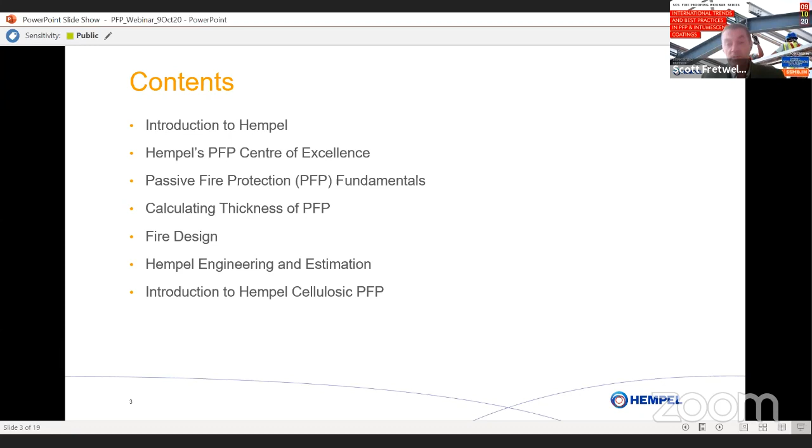So Hempel Paints, who are we? Hempel is a company with over 100 years of coating experience, able to offer a wide range of protective coatings to suit all requirements, from specialist coatings enabling fast steel production, to environmentally friendly paints and passive fire protection solutions. Whatever your requirements, Hempel will have you protected.

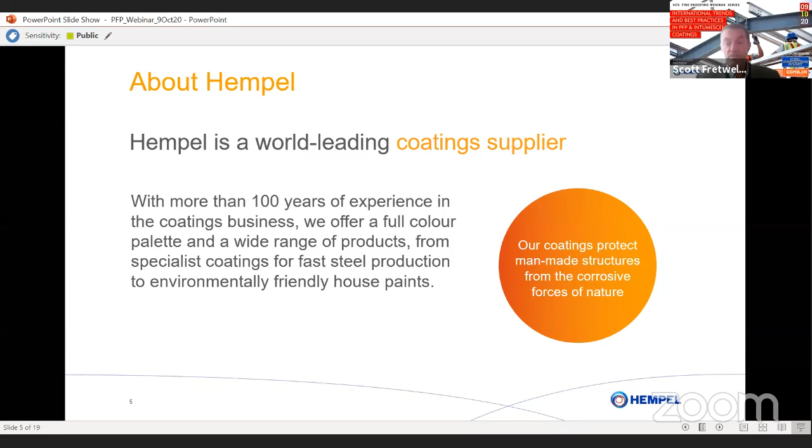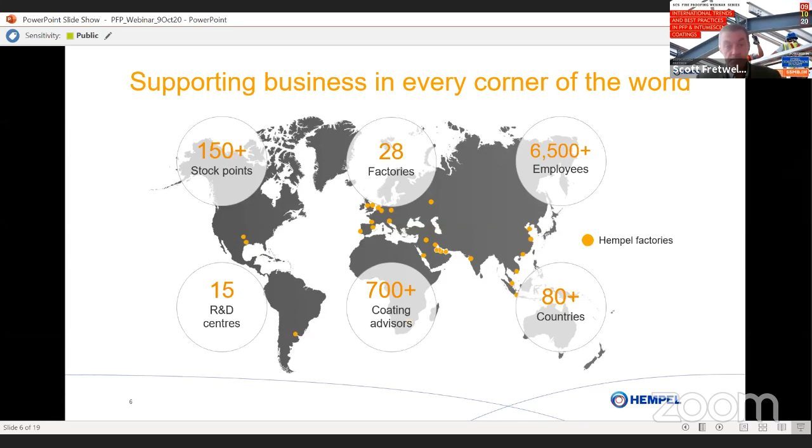We also have our global network of more than 700 certified coating advisors. With this, we're able to support your coating processes, specifications, and maintenance procedures to ensure the full utilization of your time and resources during coating applications.

For fire protection, at the heart of this is our R&D PFP Centre of Excellence facility. In 2018, we inaugurated our Centre of Excellence in Barcelona, Spain, which was purpose-built with one focus in mind: passive fire protection. This state-of-the-art facility comprises over 3,000 square meters of laboratory space and is home to many highly skilled professionals such as technicians, scientists, applicators, fire testers, and engineers, all dedicated to the development of fire protection.

So why do we do this? Why do we build this? Well, a few reasons: state-of-the-art fire testing equipment for product innovation, world-class product development, and to provide a base for our business technical expertise function, which enables us to further support our current fire protection products and customers with technical advice, estimations, and fire designs around the world. It's our ambition at Hempel to become world leaders in passive fire protection, and the building of this facility was the start of this journey.

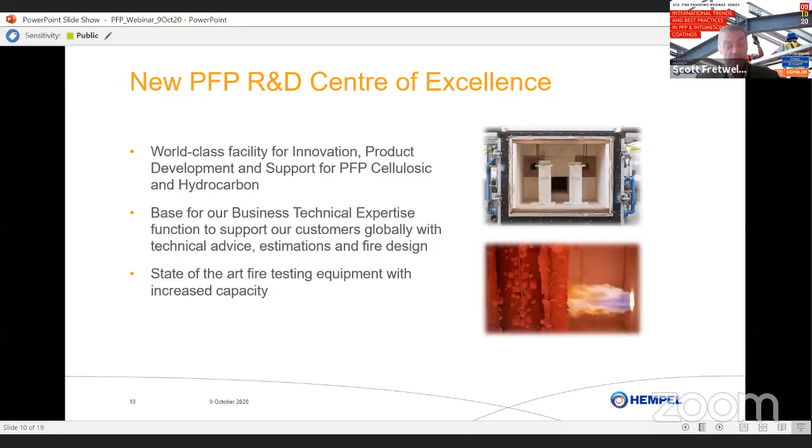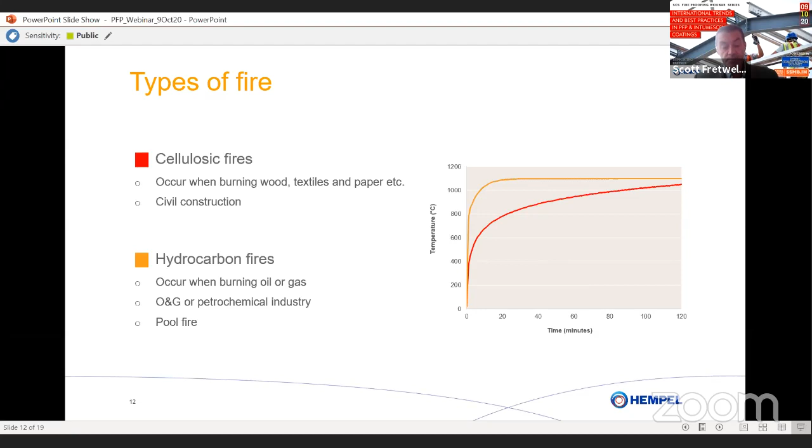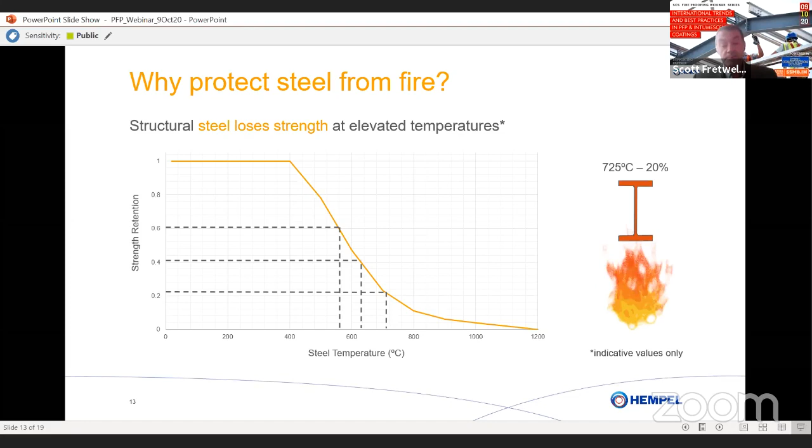So why do we protect from fire? Why do we want to prevent this from happening? Well, the temperature rise needs to be prevented so that the building can maintain its structural integrity in case of a fire.

This will enable safe evacuation of people in the building and also provide access and time for emergency responders to fulfill their roles without fear of building collapse.

If you would imagine a large multi-story building, and we take the picture on the right, if you were situated on the top floor and there happened to be a fire on the first or ground floor, you would hope and expect to be able to evacuate the building in good time and without fear of building collapse.

Another factor is asset protection. Buildings, as we know, are very expensive, and replacing the building every time there was a fire would not be sustainable. So protecting the building and the building's assets are equally very important.

And finally, there is legislation, a legal requirement to maintain these structures for a given period of time. And this is usually in accordance with local, national, international building codes.

So what is an intumescent coating? This is a reactive coating which resembles, in a normal day, a decorative system. And once applied, will lie dormant on the steelwork.

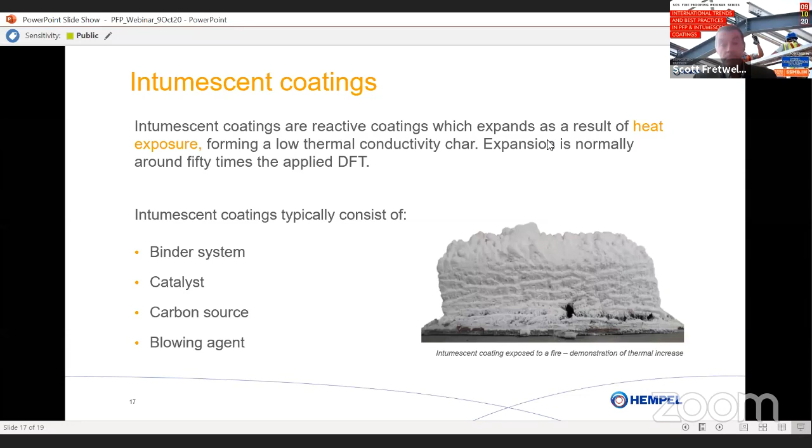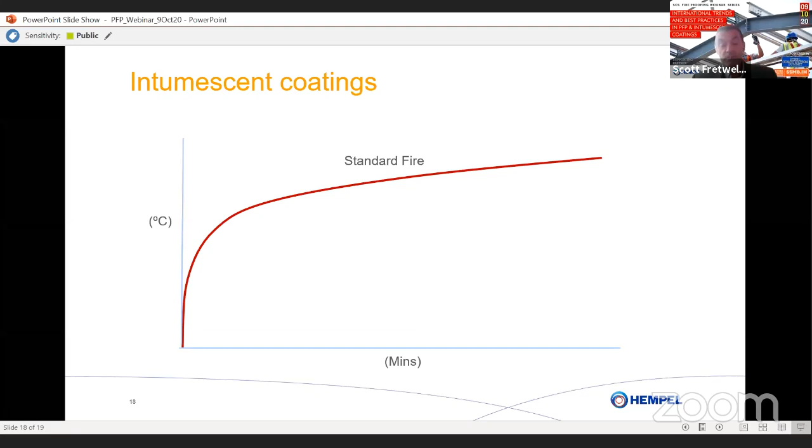In the event of a fire and the steel was unprotected, it would reach its critical temperature within 10 to 15 minutes, which clearly would not be sufficient for building evacuation, for any safe access for emergency services, or provide any protection to the building or its contents.

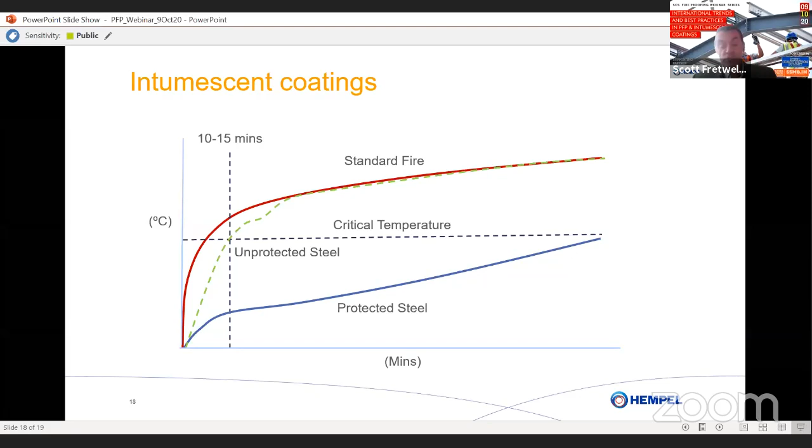By protecting the steel with an intumescent coating, you can now see we're able to provide thermal protection to the steel for a longer given duration of time. Again, these duration of time will be dedicated or dictated by local, national, international building codes.

One of the things we've been talking about is that steel is a very versatile construction material used globally. It enables very sustainable structures to be constructed in a fast and efficient way. But like all materials, as Scott mentioned, they lose their properties at elevated temperatures, and we need to provide protection to these elements. One of those ways is to apply an intumescent coating.

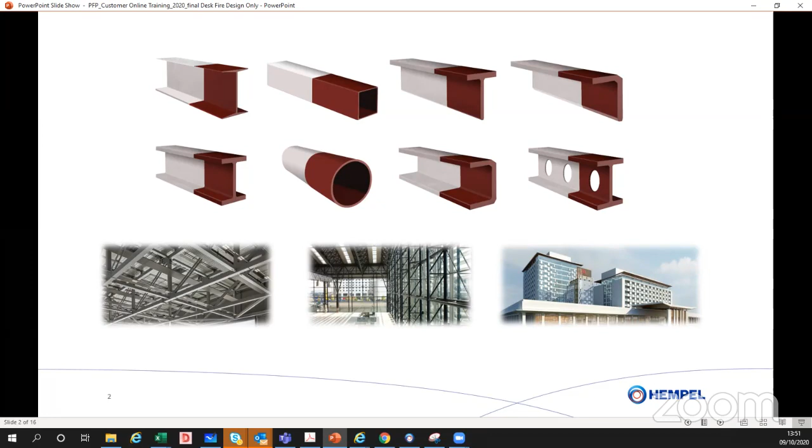But what actually goes into calculating the thickness of an intumescent? One of the questions already asked was, how do we actually estimate the amount of coating required? It's a very complex process to derive the thicknesses required for steel. In the event of a fire, there are three major parameters that we need to calculate the thickness of an intumescent coating.

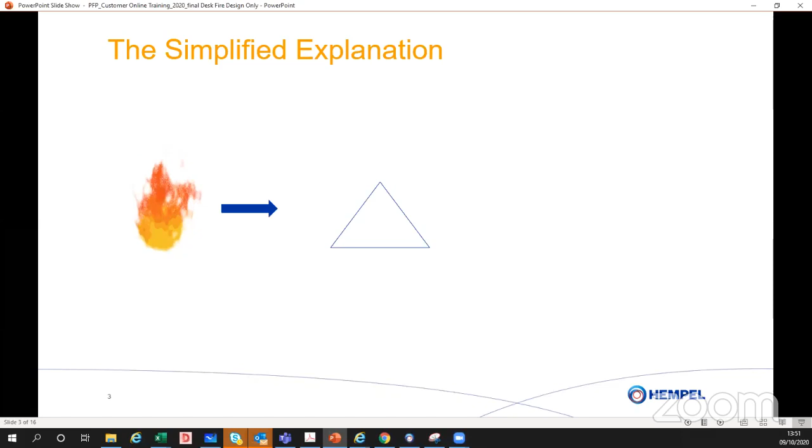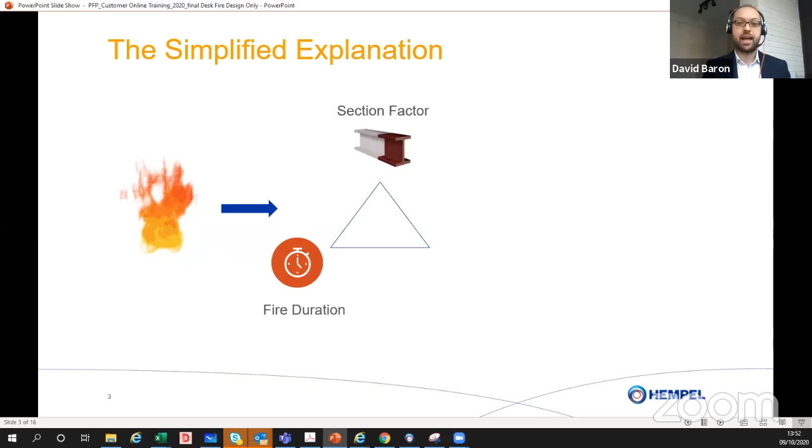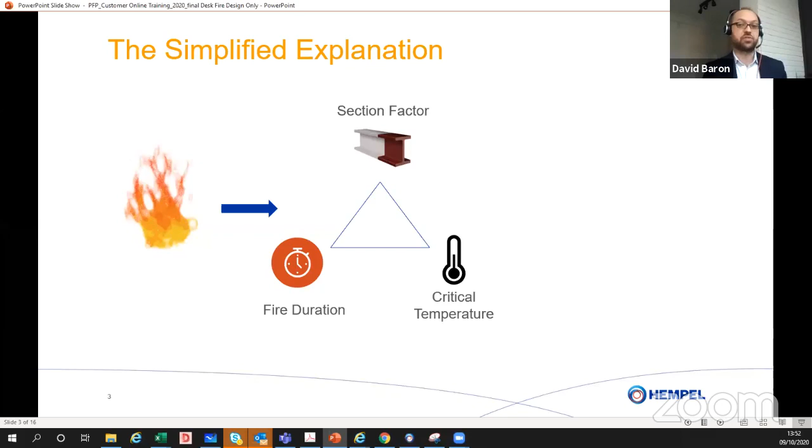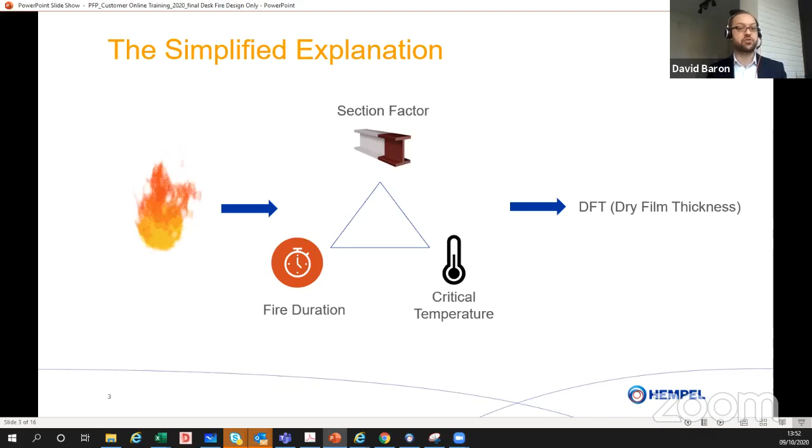One of these parameters is known as the section factor, related to the steel geometry and the actual steel sizes used within the construction. The next is the fire duration - how long does the building need to maintain its structural stability? And the third parameter is the critical temperature - at what temperature does the steel be deemed to have failed under the fire condition? Once you have these three parameters, you can calculate a dry film thickness of intumescent. I'd now like to go through these three parameters in a little more detail.

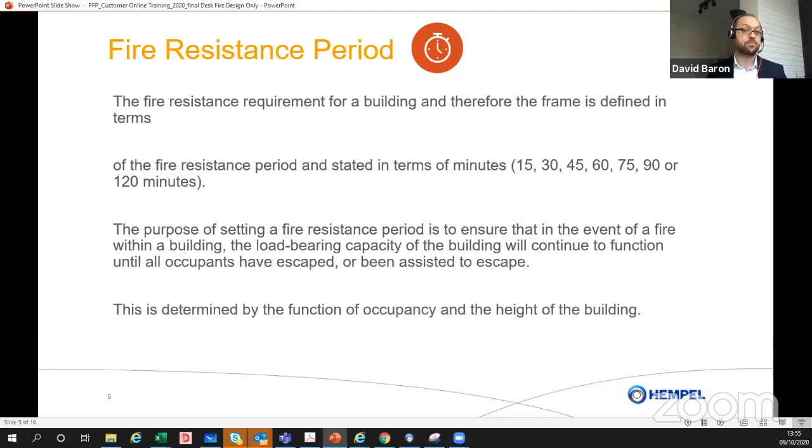The next parameter we need is: how long does the building need to maintain its structural stability? This is often given as a fire resistance period in minutes - 15, 30, 45, 90, 120 minutes. These are usually derived from local legislation or international standards, and decided based on the height of the building, the occupants within it, and other variables to determine how long that building needs to maintain its structural stability, so people can escape, emergency responders can deal with the blaze, and ultimately save the building from the effects of fire and ensure it can be reused afterward.

The third and final parameter we need is critical or limiting steel temperature - another key parameter Scott mentioned in his slides. At what temperature does the steel be deemed to have failed under fire conditions? As manufacturers, there are prescriptive limiting temperatures we can adopt if we know nothing about the structural use of the building. In the USA, these are usually 538 degrees C for columns and 593 degrees C for beams with a concrete slab on top.

In the UK, Middle East, India, and New Zealand, we typically find those prescribed temperatures are 550 degrees for columns and 620 for beams. In Europe, temperatures are around 500 to 550 degrees, depending on the country. These temperatures come from the design codes typically used for construction. One part I'll discuss in a bit more detail, at a high level, is how you can calculate these temperatures using fire design concepts and looking at the applied structural loads within buildings.

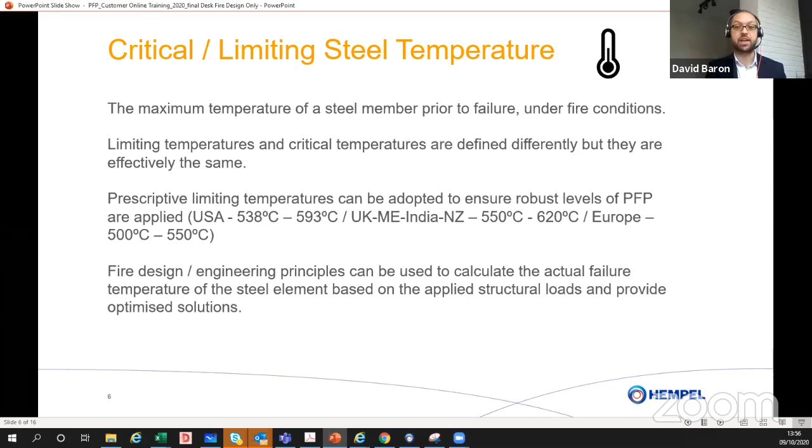To put this all together, I have here an example of one of our products, Hempafire Optima 500. We test all of our products at third-party certified laboratories to essentially build what's known as a multi-temperature assessment, which has parameters such as temperature, section factor, and duration. This is an example of the sort of data we get from these third-party laboratories.

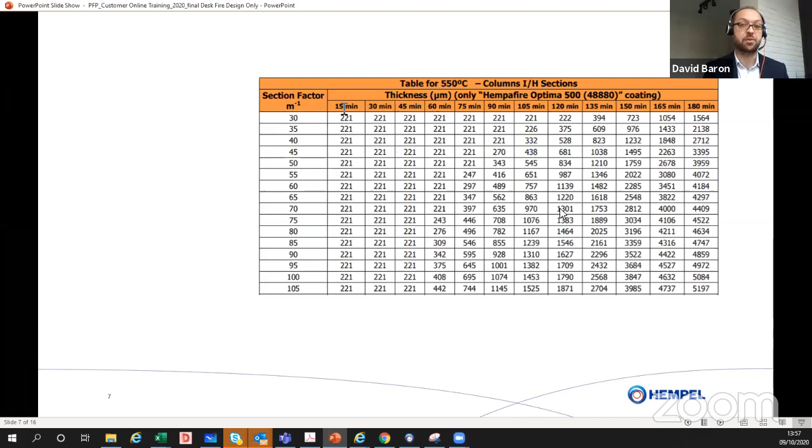So if you had a project, say it was 120 minutes fire duration, and we knew we had a steel column with a section factor of 80, and a limiting temperature prescriptively of 550, we would simply turn to the correct page in the assessment. So in this case, 550 degrees. We would be able to read off from the fire duration, 120 minutes, and then finally read off from the section factor.

For this example, the thickness of intumescent we would require for that one profile on that project is 1.464 millimeters. If the section had been lighter, the DFT would be bigger. If the section had been more stocky with a lower section factor, the DFT would have been smaller. But this is how we derive the thicknesses for projects.

So that is the fundamentals behind what estimation looks like for fire protection. One of the things I wanted to cover here was a little bit about what an engineered approach might look like - rather than taking a prescriptive route, seeing if we can actually optimize the fire protection requirement on these structures through fire design.

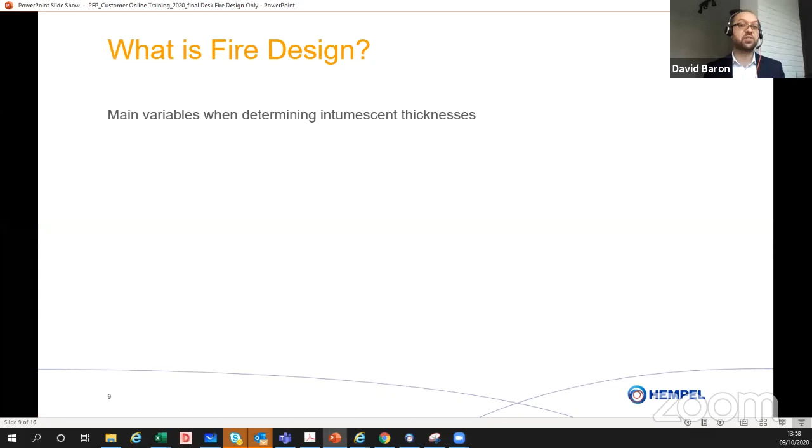First of all, what is fire design? Well, the slides we saw before - we have three main variables that we need as manufacturers or designers to calculate the thickness of intumescent coatings. One parameter is section factor, the other is fire duration, and the other is this concept of limiting temperature.

Now, quite often the steel sizes have already been designed by the structural engineers, and possibly already fabricated or even installed, so there's sometimes not much opportunity to modify these sizes. The fire duration is derived from local legislation and based on the occupancy and height of the building, typically. Again, this is very difficult to change unless you look at a real fire engineered solution, looking at the fire loads within the building, the ventilation conditions, and actually start looking at it from a real fire perspective. But again, not something that is typically done or that would take a long time to be able to do.

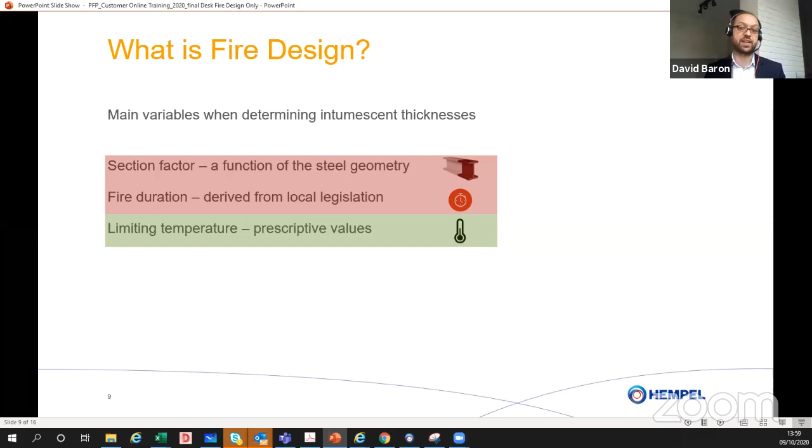But really, the one parameter I want to discuss with you today is this concept of limiting temperature. As I said earlier, this is something we go off prescriptive values within the industry. As manufacturers and designers, if we do not know anything about the structure, we should be defaulting to these values. But these prescriptive values were created by the industry quite a number of years ago to ensure a robust level of PFP, or passive fire protection, is applied onto structures.

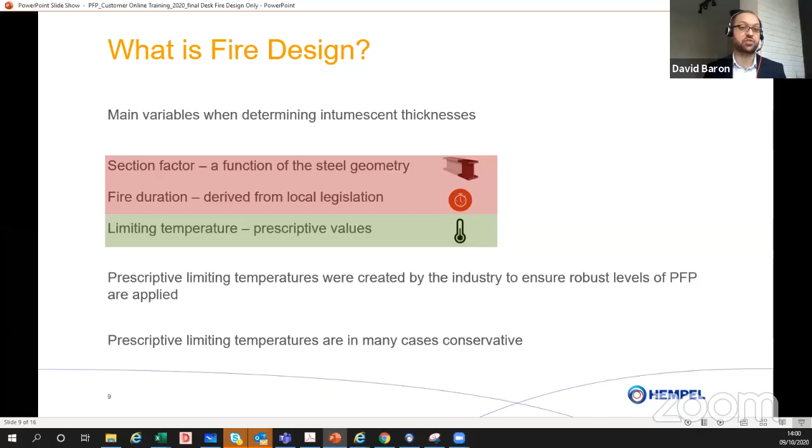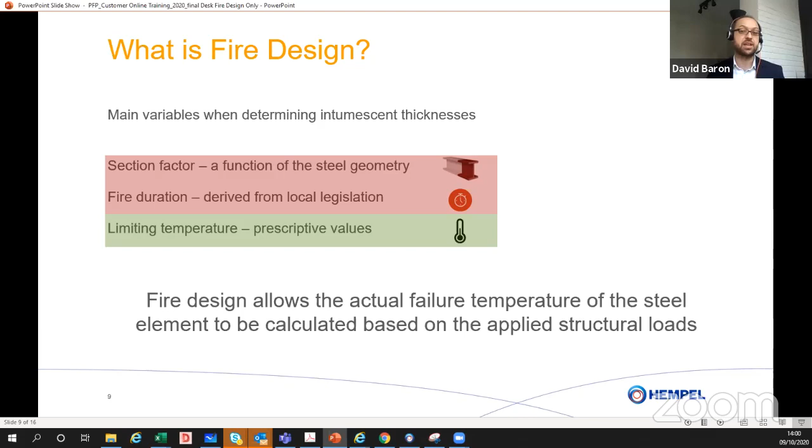But this means that inherently these temperatures that were selected in many cases can be quite conservative. The reason for this is they were meant to be a catch-all, so that any structural type or structure type would be protected adequately. But ultimately, fire design allows you to actually calculate these failure temperatures in the steel elements based on the applied structural loads.

And this is all within the design codes - codes such as BS 5950 and the Euro codes, and even the Indian design codes have a fire part within those codes to be able to optimize the fire protection requirement, looking at the structural stability and the actual loads applied.

This enables fire engineers and structural engineers to balance the various factors, such as the composite action within the structural frame, the loading factors, and the end use of the structure and the occupancy type, to be able to calculate these temperatures, which can differ significantly from the prescriptive ones I showed earlier.

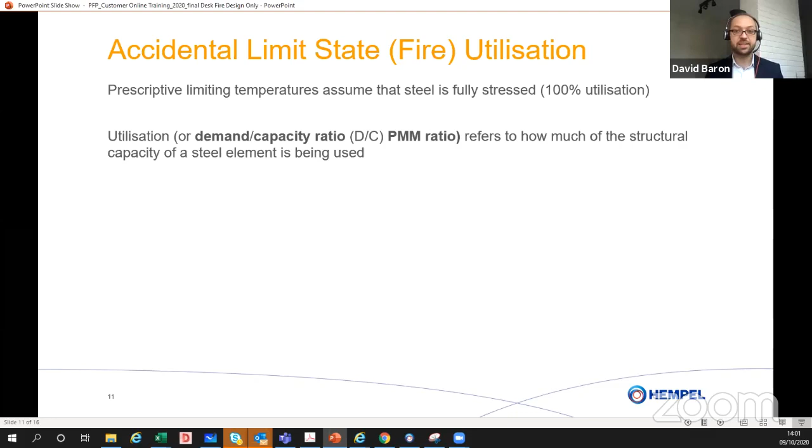The key to unlocking this sort of approach in fire design is to start looking at the structures in terms of something called utilization, or more specifically, the accidental limit state in fire. These prescriptive limiting temperatures I showed you earlier, the 620 and 550, are all based on the assumption that steel is fully stressed at normal temperature design, 100% utilization. Utilization refers to how much of the capacity of steel is being used.

I've got an image of how this looks. So if I was an engineer with a steel beam, I may load this up to 100% of its capacity, or 100% utilization, in normal working life. If I could apply no further load without that beam failing, I would class that as 100% utilization. But engineers typically like to sleep at night. We don't often design all our buildings to be at 100% utilization. There may be some elements within a structure at this level, but more often than not, you find there's a variation all the way down to 0% for your more minor tertiary sections.

So typically there is a range of utilizations, but very often it's not at 100%. More importantly, when we talk about fire under the design codes, including BS 5950, Eurocodes, and the Indian design codes, there is a load combination for the fire limit state. This enables you to actually lower the utilization in the fire limit state, or the accidental limit state for fire, because you don't expect there to be as much live load in the building, and you don't expect the dead load to be increased either. So you actually have different load combinations to reduce the utilization in fire. This is all well documented within the codes.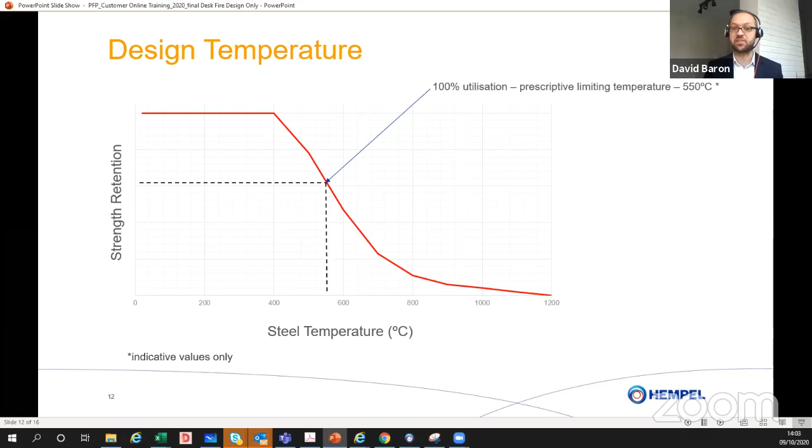Please note these values I'm showing are indicative, just to show at a high level the concepts behind the fire design approach. But if I was told by the structural engineers that the structure actually wasn't loaded beyond 80% of its utilization, the design temperature would be higher. This is because there is more capacity left within the steel, so you can allow the steel to get a bit hotter. And again, if the steel was only stressed to 60% of its utilization, the design temperature would increase again because of that extra capacity within the steel.

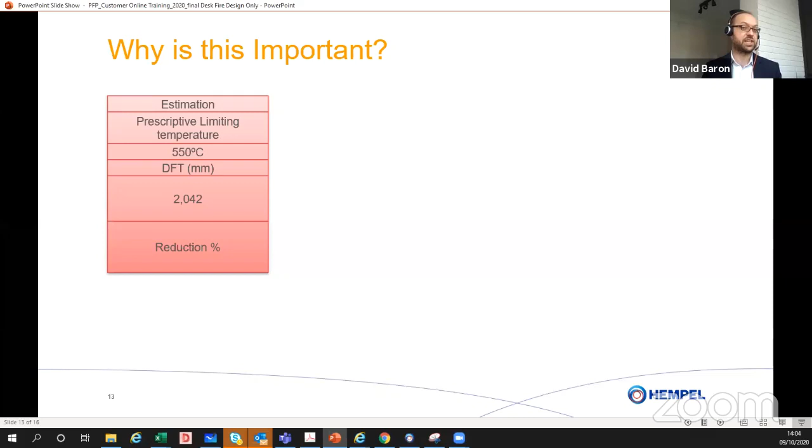And why is this important? Well, as we mentioned in one of the first slides on the estimation approach, if we know nothing about the structure, we would default to 550 degrees and provide a DFT depending on the steel size - maybe 2 millimeters in this example. But as soon as we start looking at a fire design approach and actually start to look at the structural response or the utilization within steel, something will happen. If we were told the steel is at 100%, we would expect the answer to be the same as the prescriptive limiting temperature, because that's where it comes from. But as the utilization drops, or there's more capacity within the steel, you can see that the thicknesses required on projects or on those steel elements actually decreases.

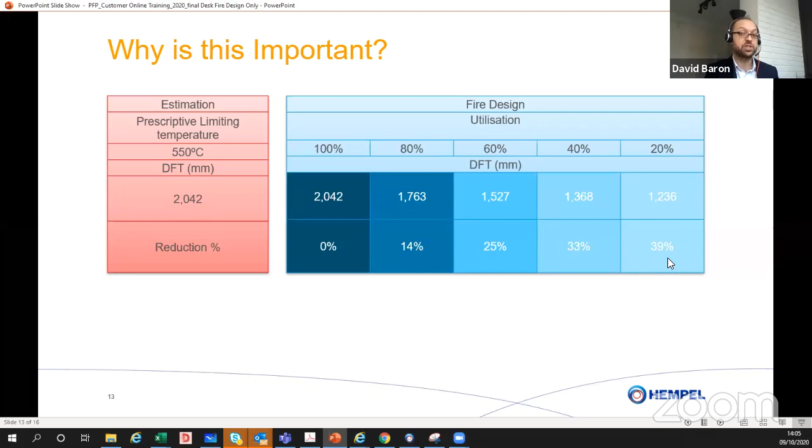So for 80% utilization, you might see a 14% reduction in thickness and associated volume for that profile. And if you have very light tertiary elements that might not be doing much in the fire limit state, you might even have reductions of 40% for down at 20%. The key takeaway here is the lower the level of utilization within a structure, the higher the design temperature, and thus the lower the dry film thickness of intumescent required.

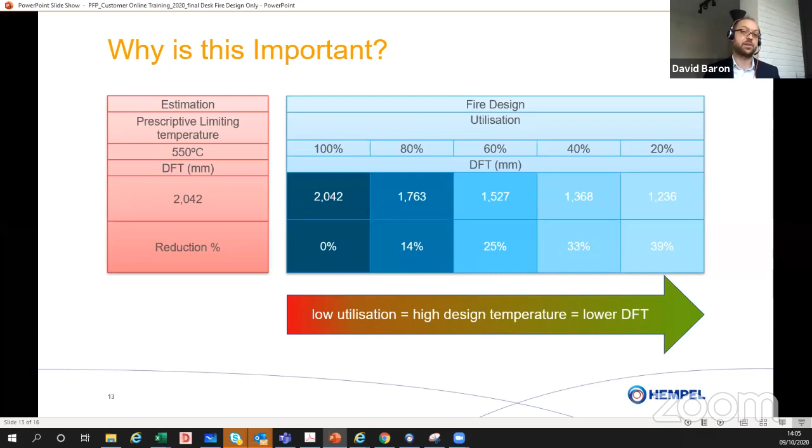And using fire design can bring many added benefits to projects. First of all, there is a clear potential to reduce the overall volume required on a project. But also, along with that, you also get application enhancements as well - you do not need to apply as many coats, so the labor costs and time to actually complete projects also reduces. And something also very important going forward in the built environment is sustainability. If there are less chemical processes, less paint, and less labor on projects, there are sustainability benefits as well from doing these kinds of fire design assessments on projects to optimize the fire protection requirement.

And Hempel very much wants to work on key projects and work with design teams to look at actually optimizing the thicknesses through fire design, and becoming part of the design process to make sure that the steel part and the fire protection part are considered holistically and combined to make the most efficient systems for both steel and fire protection.

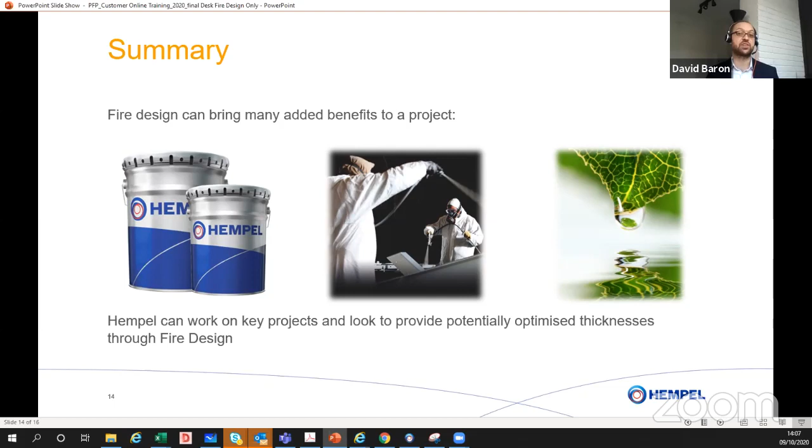And I only have one more slide before I hand over to my colleague Roger. I just wanted to briefly go a bit about Hempel's estimation and engineering function. Now, what we've been discussing here is how we calculate thicknesses and how things can be engineered. But Hempel have been investing heavily in our competencies - that is our people, our engineers, our estimators, our designers, and our coating experts, to be able to give the best solutions on projects globally.

We have spent a lot of time building teams through Europe, Middle East, Southeast Asia, to be able to provide this globally and provide the best estimations and, where possible, fire design assessments on projects. But not only have we invested in the people, we've also been investing in the software to enable us to be more efficient and provide you with the most accurate thicknesses for your projects, depending on all the parameters we discussed before. Along with what my colleague Scott mentioned, tie this in with the fact we have opened a new state-of-the-art laboratory in Barcelona and our global footprint.

I think you can see that we are committed to becoming leaders in passive fire protection. And we very much welcome working with you all on your projects at whatever stage you are within your projects, at design or at construction, and even after during maintenance. So I would like to thank you all for your time. I would now like to hand over to my colleague, Mr. Roger.

So, okay, so I'm Roger Soler. I'm based in Barcelona. I'm responsible for fire protection products, for cellulosic fire protection. So let's go. Protecting steel - for us at Hempel, we started protecting products from corrosion more than 100 years ago, and then we moved also to protecting from fire.

As buildings have different parts with different roles - like the foundation, the structure, or the roof - in coating systems, it's a little bit the same approach. There is a primer that ensures the adhesion of the system to the substrate, like a foundation, in the cold state, so in normal conditions, but also in fire conditions, what we call stickability, that allows the char to be there working. And finally, also providing the anti-corrosion properties to make sure the product will last for a long time. The intumescent protects from fire, as my colleagues already explained.

It's expanding and giving the right time. And then there is the top coat - it's the roof of the system, providing an aesthetic color function, giving the desired finish, but also a sealer function to prevent early degradation and inactivation of the intumescent layer in case the service conditions are severe.

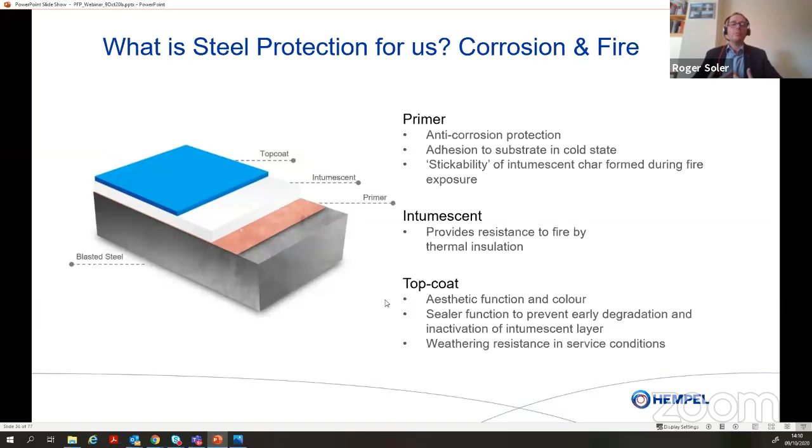So that could be an attack from strong weather elements. Protecting the steel from corrosion and from fire will need durability in these weather conditions for a long time. And we will be testing the protection of the steel.

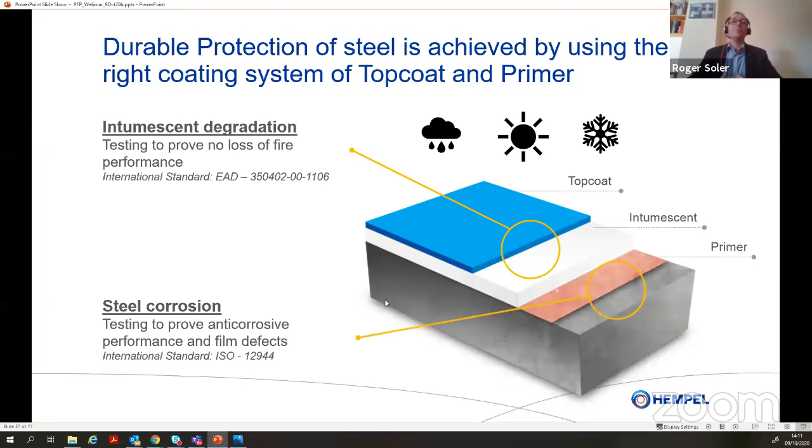We always look in two ways. One is the steel corrosion - we do all the standard tests that could be done on an offshore platform in the middle of the ocean. And then we also do the specific tests for the intumescent paints to make sure there is no intumescent degradation, following different international standards.

It's important that it's a compatible system, really like a glove to the hand, because we need this compatibility. At the end, we want to limit the risk in fire protection. The point is that if we are using a wrong primer or top coat, at the end, it's not like in standard corrosion projects that we normally find. It's not just that there is corrosion, or even if it is a tank lining, that there could be contamination of the food inside. In the case of PFP, if there is a fire, then it is a potential loss of life.

And it doesn't allow us to put it in the plant maintenance. When there is a fire, everything needs to work properly.

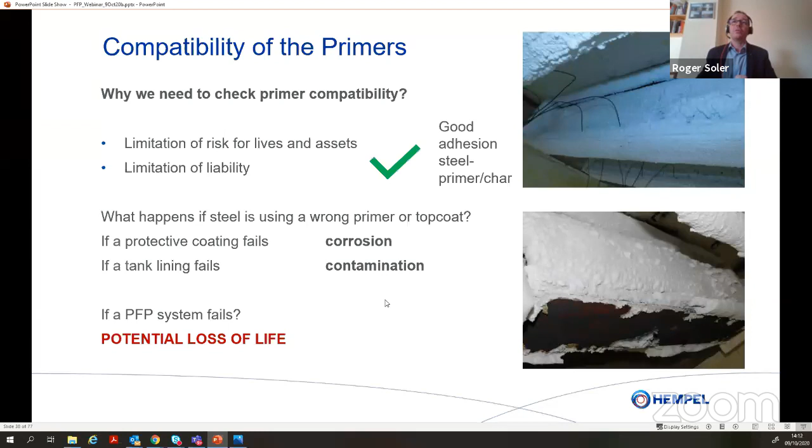So here on the right, you see the pictures. These are steel sections tested in our furnaces, where we checked if there is good adhesion or bad adhesion. This is simulating a three-sided beam. Here you can see the web and the flanges, and those lines are the thermocouples that we install to check the temperature during the experiment.

On the top, it worked. The char developed, producing this white char that provides insulation properties. On the bottom, there is a primer that looked okay in the cold state, so there is good adhesion in normal conditions for a paint.

But when it comes to fire, the whole system just falls out. When the char falls, the steel is exposed, and there could be an intake of heat much higher than is desired, so the building would collapse sooner.

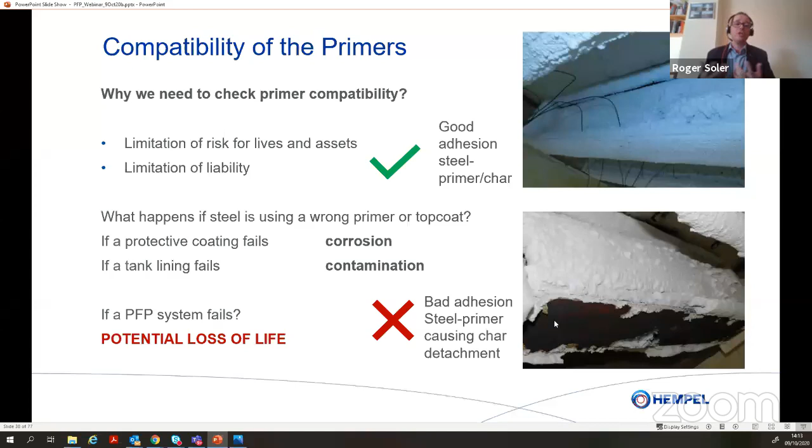That's why, when a system is specified, it's not just separate pieces - we need a compatible primer, and also the same for top coats.

There are very demanding conditions during the life of the building, depending on the exposure, like humidity, ultraviolet rays, temperature changes, and the sealing will depend on the type of top coat we are using. It's important to select the right one so they behave in the same way, for instance, with thermal expansion and contraction.

Here I'm showing a picture of a sample of a system that has the same thermal expansion and behavior. So after the exposure, there are no cracks. And when we test them in fire, there is normal expansion.

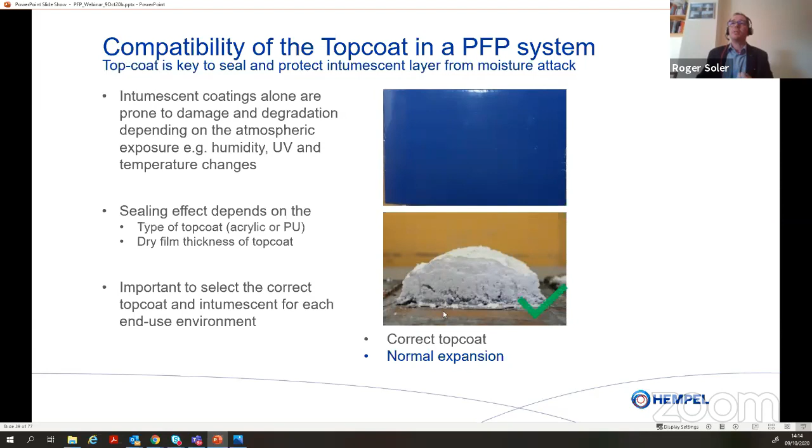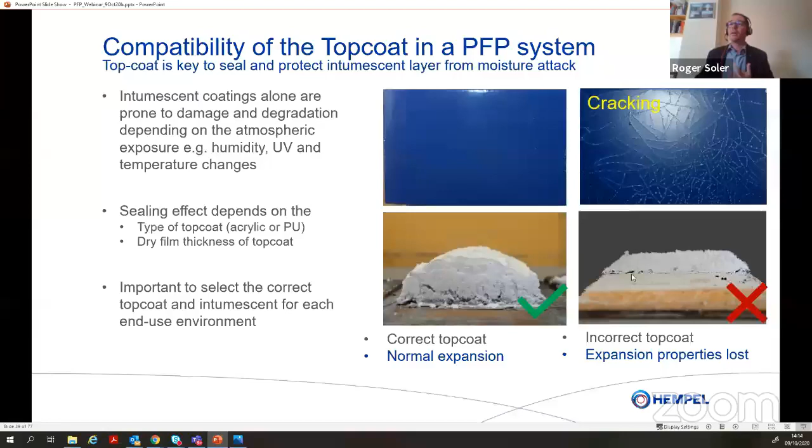But some systems might not be compatible once they've been exposed to this aging, so there might be cracking, for instance. Through this cracking, humidity could penetrate to the intumescent layer, and depending on the type of intumescent paint used, it could not be resistant to that, or at least the intumescence level would be reduced, so the expansion properties would be lost. This would be a failure to protect the steel structure.

So protecting the steel requires considering the different types of environments and how it needs to be done. Recently on LinkedIn, we published a white paper on cellulosic fire protection. You can take a look there, or reach our colleagues, reach us, so we can better explain things and solve any doubts you might have.

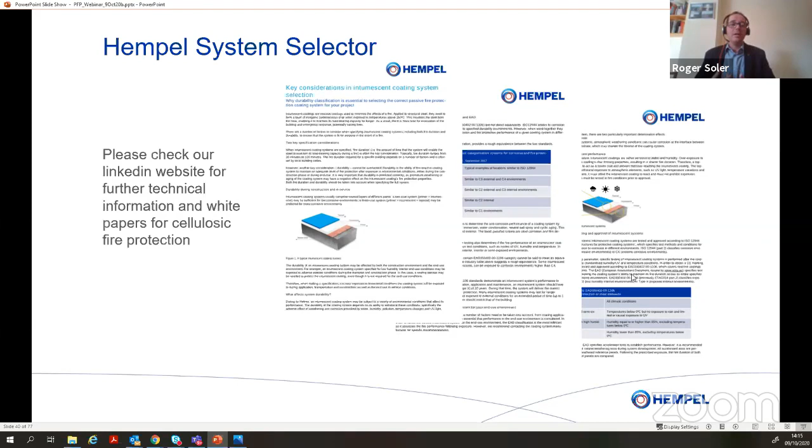So the coating worked properly. The owner of the building indeed was very happy, so we have a case story on that. And the fire department gave acknowledgement to the fire protection, that it helped the structure resist that blaze.

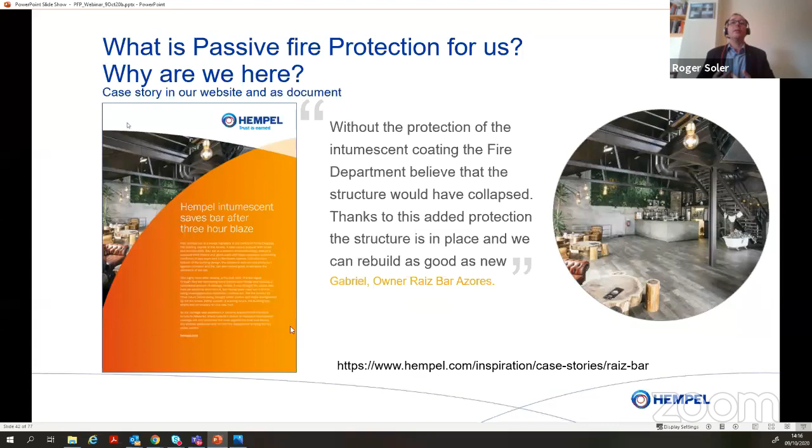So they cleaned and gave the right roughness to the steel, blasting when it was possible, and also using other media to provide the right roughness of the surface, and then put again primer, intumescent, and top coats to make it work.

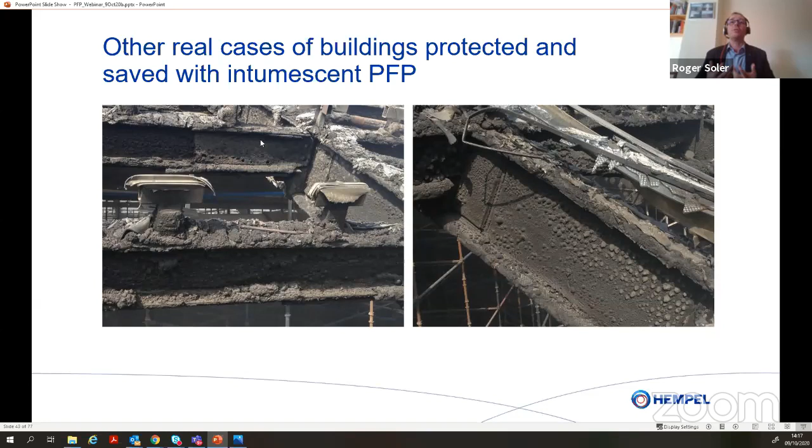So we trust our products. We test them, but we also have seen them working. So we trust them also for our own buildings, we protect them. This is our new R&D facilities in Denmark that are being protected with our products. We are doing buildings also for other customers, so we have different types of buildings in many different countries.

So this is an example in Oman of a hospital. But we have also many Porsche shopping exhibition centers in Germany, where the customer precisely liked the productivity and also the appearance of the system.

We have also our coatings in hangars, in the airports. Also in the Lakhta Tower in St. Petersburg, the headquarters of Gazprom, the building we were mentioning before. It's in the top part of the building, and we were asked to use our products. We have other examples of airports, for instance these trusses in the Czech Republic airport.

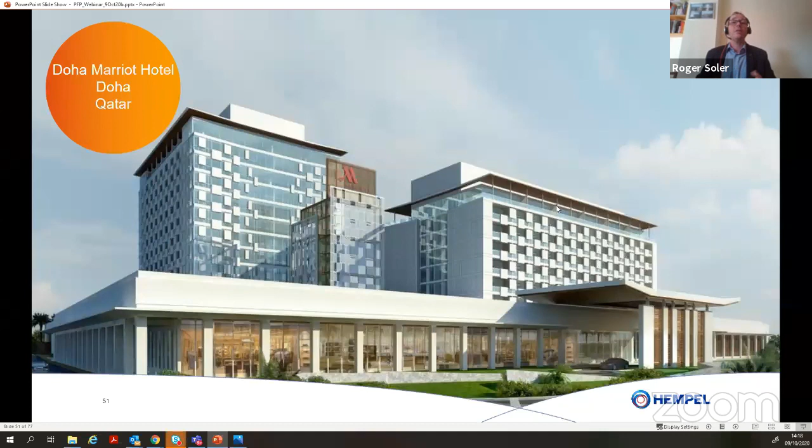Stadiums, closed ones, also open ones. So we have all types of buildings, also all types of projects. This is a restoration of a hotel. One of the key drivers of the project was to reduce the time that the painting, the refurbishment process could take, and the PFP part contributed to reducing that.

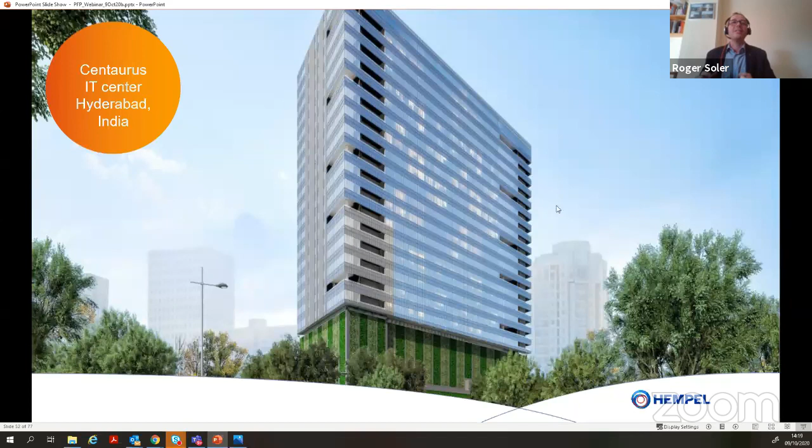And also in India, where we started coming recently, even despite COVID we have already been awarded several projects. This is the Centaurus IT Center here in Hyderabad. As soon as COVID allows us to continue, this is being painted. And many more projects. In case you need more references, just let us know.

Get in touch with your sales representative or your contacts in Hempel, because we have done many types of projects, in many different conditions, from the north of Europe to the warm and dry conditions of Qatar or Saudi Arabia, and also warm and humid conditions like those found in Southeast Asia. So this is how we are approaching it, and a bit also the product range we have and the benefits that can be provided to architects and specifiers.

I will not go into a lot of detail about our products. Our sales representatives can also help you with that, but just to mention that we have products that can help for any fire duration you might need, from half an hour to 2-hour fire protection, which is commonly found here in India too, where we've seen most buildings require 2 hours.

We also have available 2 different technologies: waterborne products, which are best suited for on-site applications, providing protection for semi-exposed conditions or building interiors, up to C3 interior conditions. That could include demanding areas like kitchens, or even swimming pool areas, or areas with relatively high humidity content.

And for more demanding environments, we have solvent-borne products, offering 2 different products to provide the optimized solution for these 2 different fire durations. The required thicknesses become a way to optimize the project, making it lower cost, with higher durability, and higher efficiency in the building process.

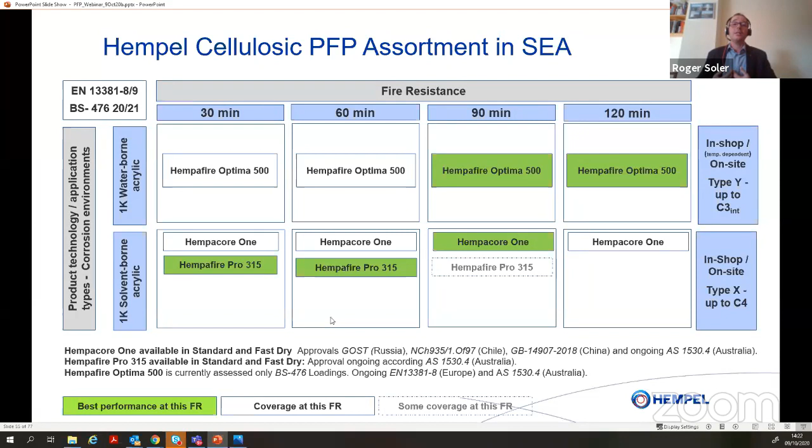Those products have different standards according to different regulations. Here we're showing the major ones that could be applicable: the BS standard used in the UK and also in many countries like India, and the European standard which is also widely accepted in many parts of the world. We also have approvals for other countries like Russia, China, and now Australia and Chile. So our products are tested to many different standards.

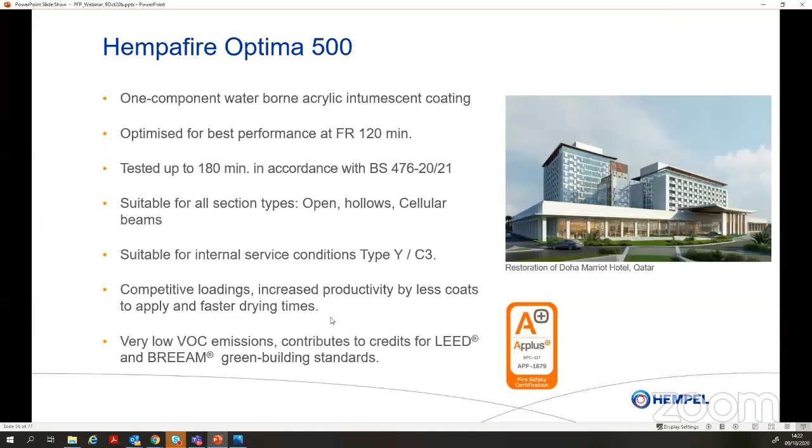I will not get into details about our products. We have the former range, and the new range, Hempafire products, and the Hempacore, which was the first product we launched. Tarun and the rest of our colleagues can better explain the products and tell you which is the right product for your project.

What we want to highlight is the benefits of the range as a whole for you. It's not only providing high performance fire protection, but also increasing the efficiency of our products for your project. We have products that are durable and proven. We take a lot of care to make sure the systems will provide the right protection with high durability, tested according to many international standards.

We want to make sure your projects do not go high on cost. So in the end, we achieve efficiency in costs thanks to reducing the amount of paint needed, and also the labor costs involved.

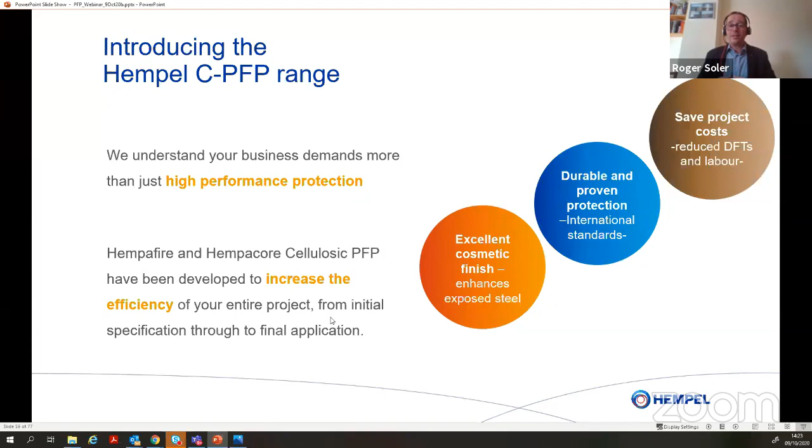The finish of the coating is important, because at the end, if we are choosing an intumescent paint, it's because we want to have a good finish of the steel. It will be exposed, so we want the project to shine as you have been thinking in the drawing board.

Our solutions have one product for all the steel sections, for all the profiles, in order to reduce the complexity and avoid mistakes during the construction phase.

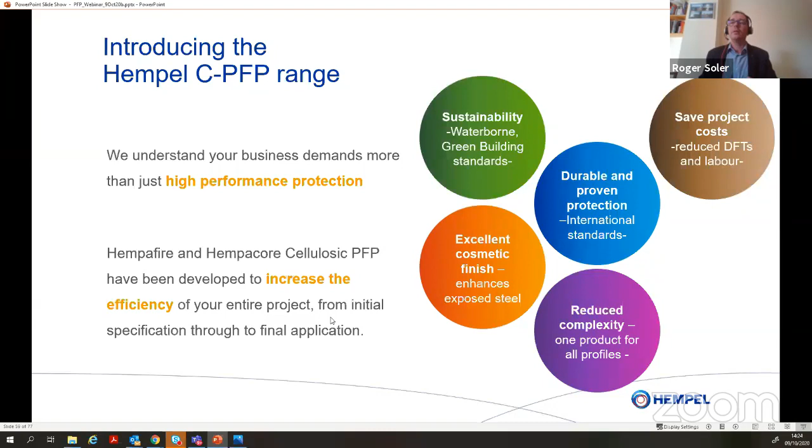Sustainability of the products is also a need for the buildings, and we have it covered to provide credits to the green building standards, making available waterborne solutions and reducing the carbon footprint in our products.

Increasing the productivity of the paint process in order to make the job completed faster, because at the end we want to help you shorten those time frames that the buildings need, and especially to overcome delays.

With this increased productivity, and also having products that are easy to apply, the painting process will not be a pain, really helping you to keep the planned schedules.

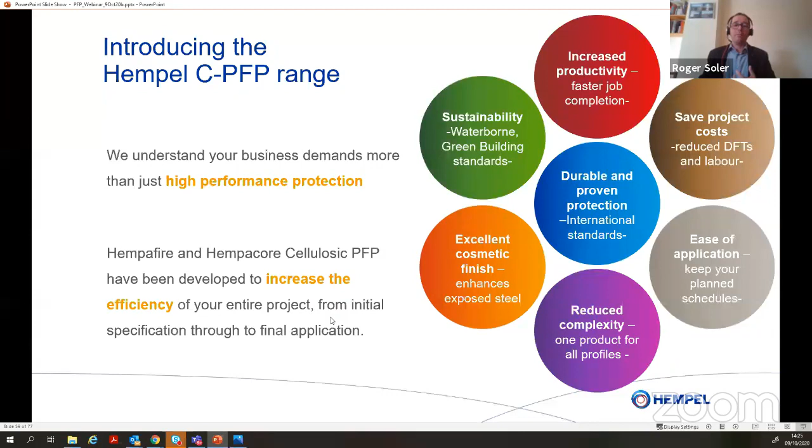Going a bit into detail of these benefits, we test our products as systems, not as separate pieces, and we test them in real exposure conditions in different parts of the world, as well as in our laboratories, with accelerated weathering tests using UV and cycles of salt spray and very humid conditions that can be reproducible.

We also have panels being tested on the roofs of many of our factories, like in Polinyà in Spain, or locations like Singapore, in order to assess durability in more demanding conditions, high humidity and high temperature during the whole year, to make sure the system will last.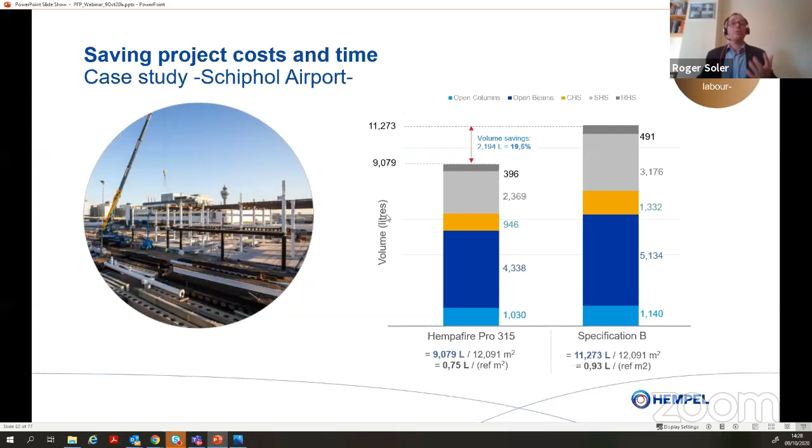That provided the benefit not only of saving the amount of paint to be purchased, but also the number of coats to be applied, the drying times in the construction process, and the speed of everything that could be done. That's a case story where a customer was very happy. You can find it on our website: the benefit of making the project go smoother, saving costs and also helping the project schedule.

The aesthetic results - as mentioned before, you use steel because it's a good constructive element, and it allows you to expose it and make nice structures. So you need it coated with a system that is to the level of your design.

We need the minimum orange peel possible, no overspray that would cause stains in the coating and give roughness to the surface that would then collect dirt. In the service life of the building it would always look dirty, because that roughness makes it difficult to clean.

The system being applied can have a wide range of finishes, textures, and colors for your project. It's not like the first cars delivered, which were only in black.

A smooth finish in France, a restoration of a building. You can see the defined detail of the coating, what it was capable of being applied, and to really enhance the steel, how it was done 100 years ago.

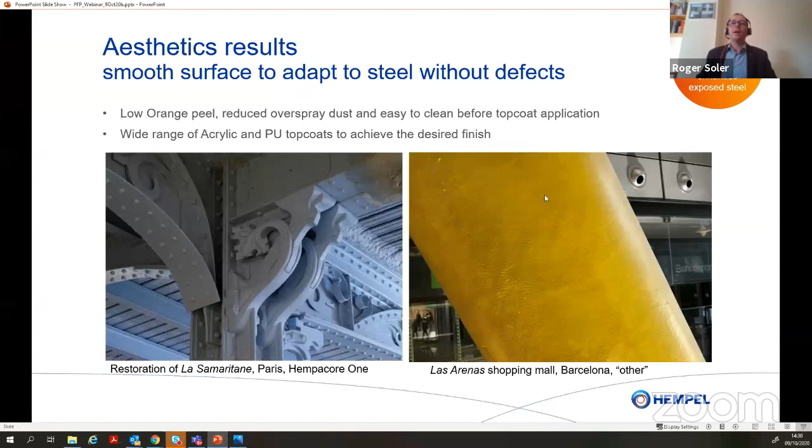Going then, just making it simple, one product can be used for any type of steel section, so there will be no confusion if product A is needed for the hollow sections and product B for the open ones. So the whole project can be specified. Our products are suitable for concrete filled hollow sections, cellular beams, open or closed sections, avoiding those issues.

Sustainability - our product contributes to LEED and BREEAM green building standards. They provide credits to these, and we also have certificates for low emission of our products and low VOC content. So we can help your project get some of these points for LEED and BREEAM.

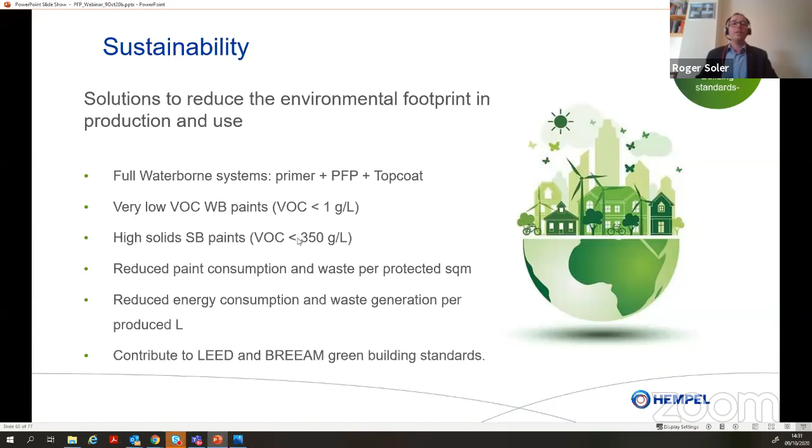And then going fast, the productivity in the project. Our coatings can be applied at higher DFTs than other coatings, which allows the systems to be applied in fewer coats.

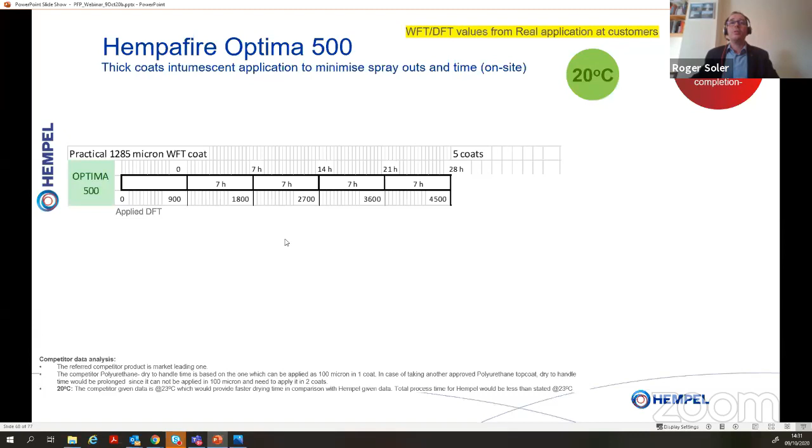So here we are showing an example where to protect a difficult steel section it could require 4,500 microns. It can be applied in just 5 coats with 7 hours between each coat. So the PFP part could take just a little bit more than 1 day at 20 degrees.

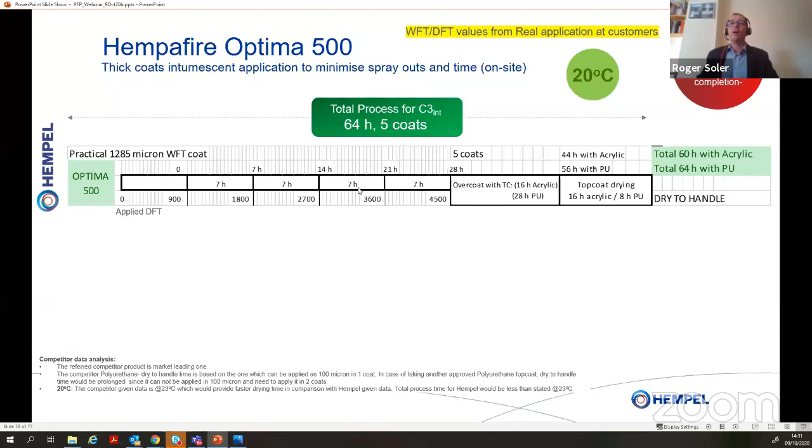So we are able to protect a difficult steel section in only 64 hours with 5 coats for these C3 internal conditions that are quite demanding. While with other coatings, it could require 20% more time, but moreover also more coats, because of the lower thickness that can be achieved in every coat applied.

So that could mean there is 40% more time that there are workers on the job site, preventing other parts of the project from going on, and also having more risk of accidents or damages to the structures.

And last but not least, Hempel is coming always very close to the painters, so we develop our products to be applied with standard airless equipment. No need for special pumps or complex 2-component or 3-component equipment that can have problems of blocking, especially at temperatures above 20 degrees.

No need for big crews or complicated application systems. We want to provide a good quality finish in the first application, so to provide you at the end that there are no delays in the project due to the painting or fire protection. That could be the main goal from us.

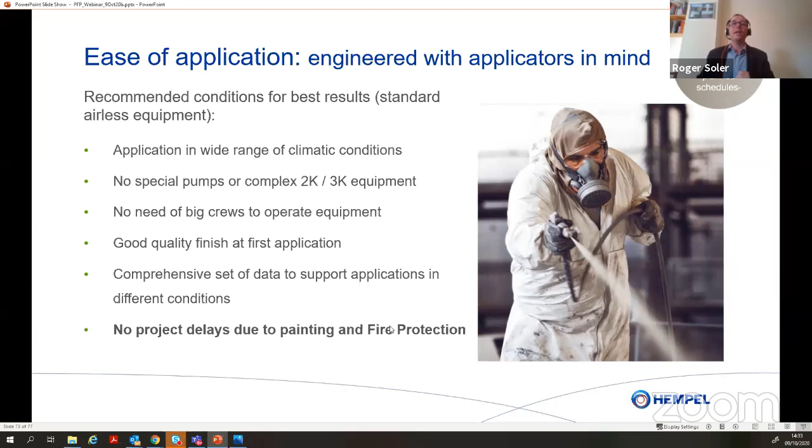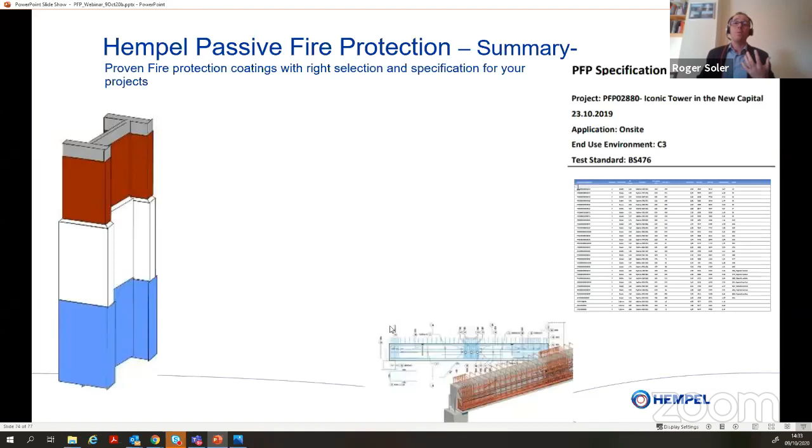So in short, fire protection is just a system of different products with different roles. We will need an estimation done, as David was mentioning before. We can provide this fire design to your projects, and then with these products we can also provide you those benefits.

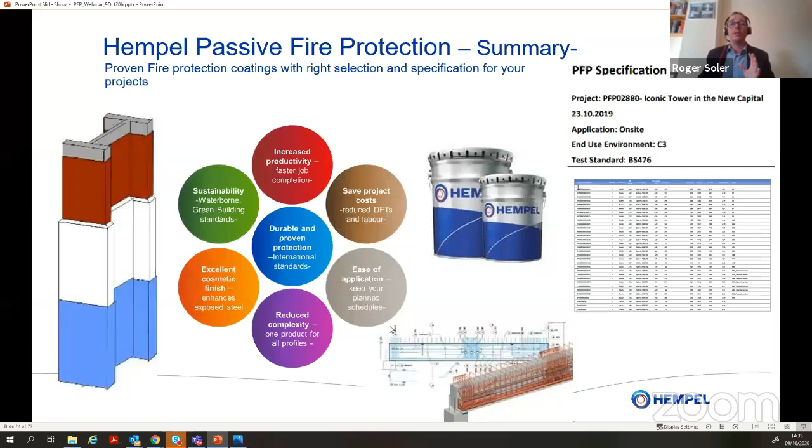Thanks, Roger. Good evening once again, everyone. I won't take much time. I just want to say that in India, we have been present since 2011, and our head office is located in Mumbai, and our factory is in Nashik. We have about 50 plus technical salespeople, plus around 17 plus coating inspectors, nationally posted and qualified, who ensure that coatings are applied correctly when you take a Hempel product.

Anandji, so maybe we can take that first question that you were talking about first. We requested Mr. Sridhar Reddy's question first. Anil sir, can you take up Sridhar Reddy's question first? He is our eminent expert panelist. I don't have that particular question with me. I'm not sure, if you have the question, you can ask. Sir, could you please put on your camera? We can see you. All the panelists, can you please switch on your cameras? All the presenters, Mr. Reddy, Sridhar Reddy ji, if you have the question and are available here, you can ask the question directly.

Good evening. This was a very knowledge sharing session. Thank you very much for your contribution, Mr. Roger and the team. So my question is, if I have to submit the structural drawings to you, so if we have a structure and the structural drawings, and we want to know what kind of fire protection to provide, can we send you the design and drawings, and would you provide the support in terms of fire protection designing?